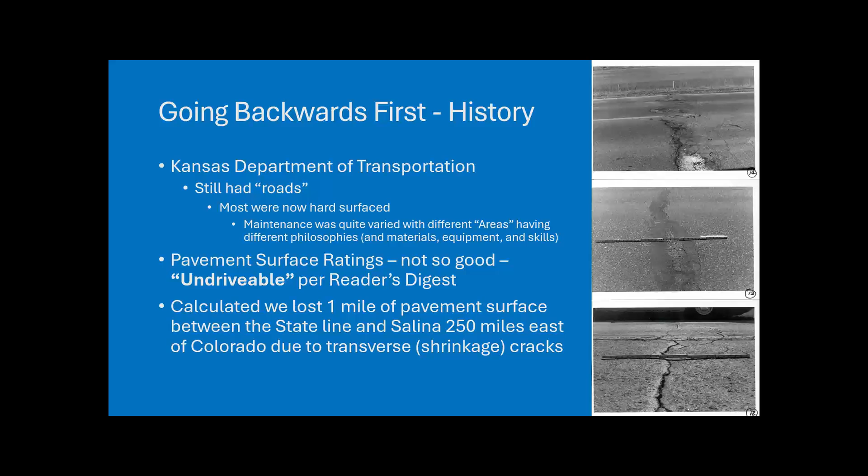The road conditions and political forces moved the governor and legislature to replace the State Highway Commission in 1975 with the Department of Transportation. This put a secretary from Oklahoma in charge. It broadened the scope from highways to transportation, and it recognized and started to act on the need to shift from construction to a maintenance focus.

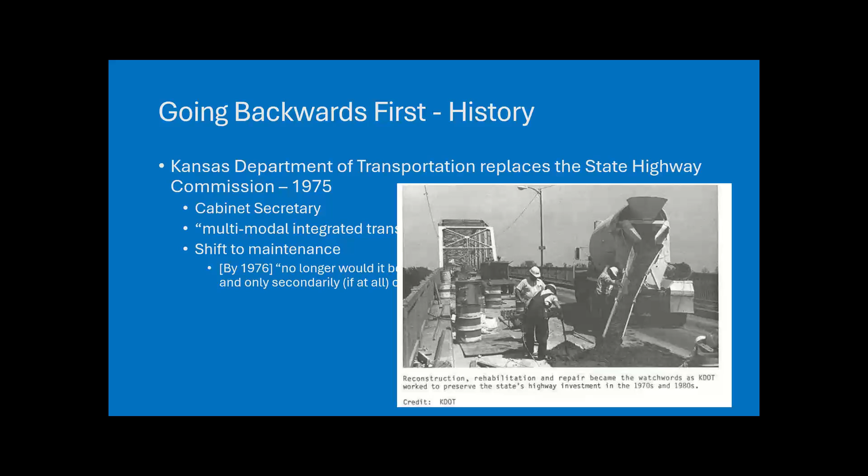KDOT was not doing all these things without outside pressure. The Kansas legislature was working on plans to tell KDOT how to build and take care of roads. Folks in KDOT wanted to make those decisions without being told by the fine folks at the State House exactly how. So we developed a priority formula to select capital projects and instituted a pavement management system to guide the selection of preservation projects. The state legislature also passed the transportation funding program in 1989.

That is not a trivial thing. Money was required to make all this work, so we need to remember to thank those folks too. What this program did, besides providing funds, was to move from KDOT working on the roads to KDOT hiring contractors to do the bulk of this preservation work.

So what did KDOT do to make these improvements? Basically, the idea was to do light work on pavements in good condition to keep them that way. It was set up to do about 1,200 miles per year, and the typical actions were chip seals and 1.5 inch overlays.

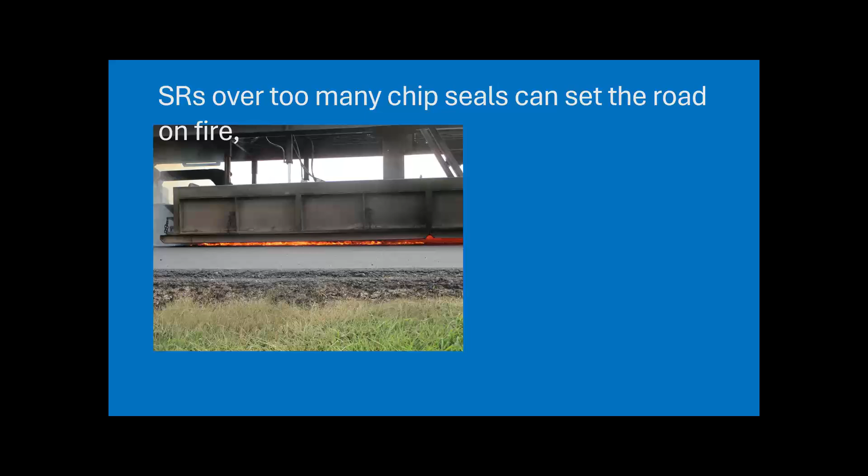For instance, this is a hot in place recycling project, and you see the flames on the road. What you may not notice is the pavement is actually on fire. This is not exactly the desired outcome of this process, and it leads to other problems like traffic trying to get past this train having to go through some fairly dense smoke. So we try to avoid situations where this happens, especially HIPR over multiple chip seals.

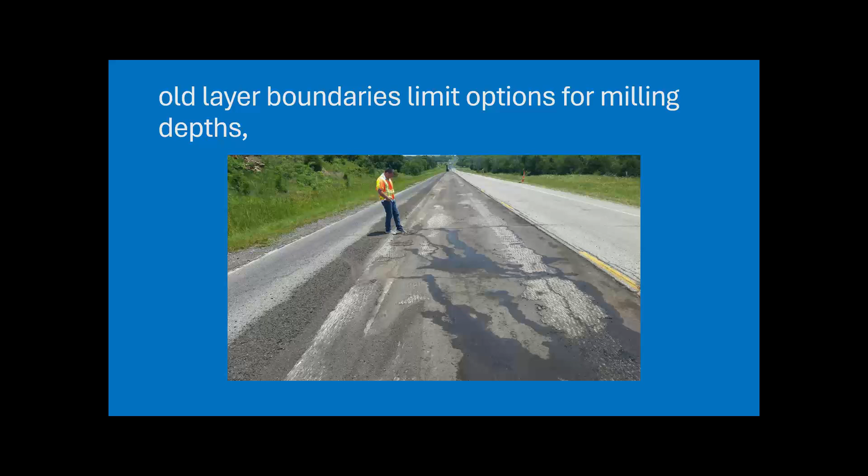Another problem we have is the depth we want to mill is not always good, in terms of sometimes those boundaries are not clean and we get scabbing like this. This guy is peeling up that remaining surface with his steel-toed Nikes.

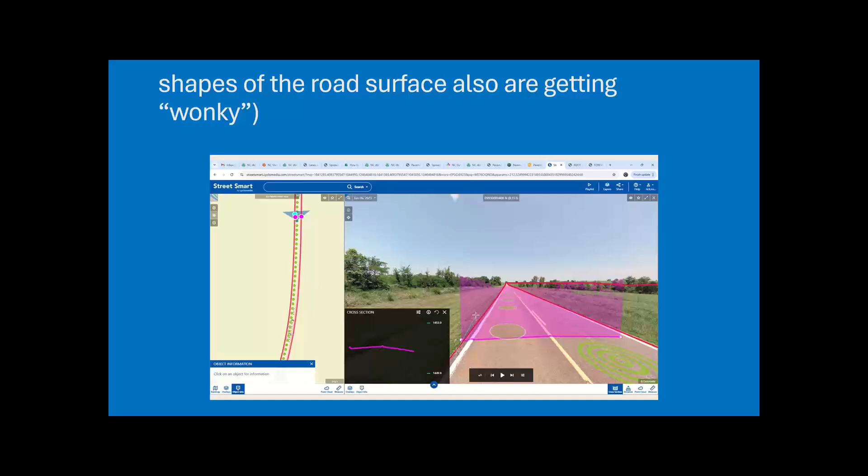So with that, the question becomes, what can we do? And I hope that my fellow panelists here can kind of pick up on that and take it from there.

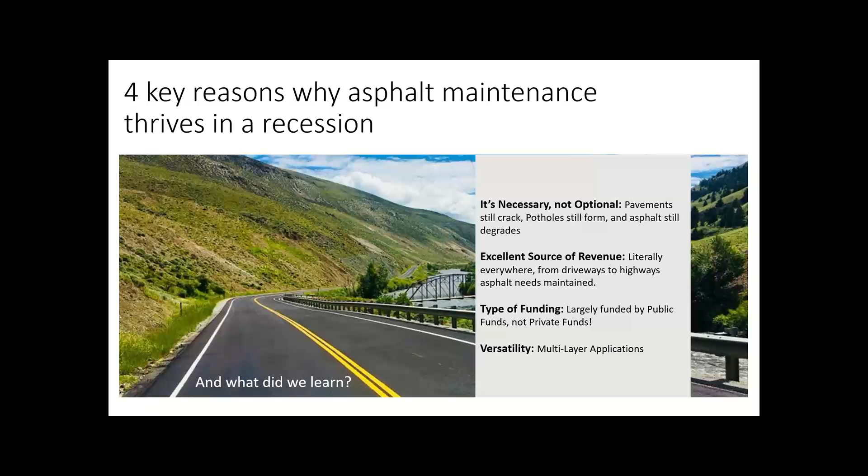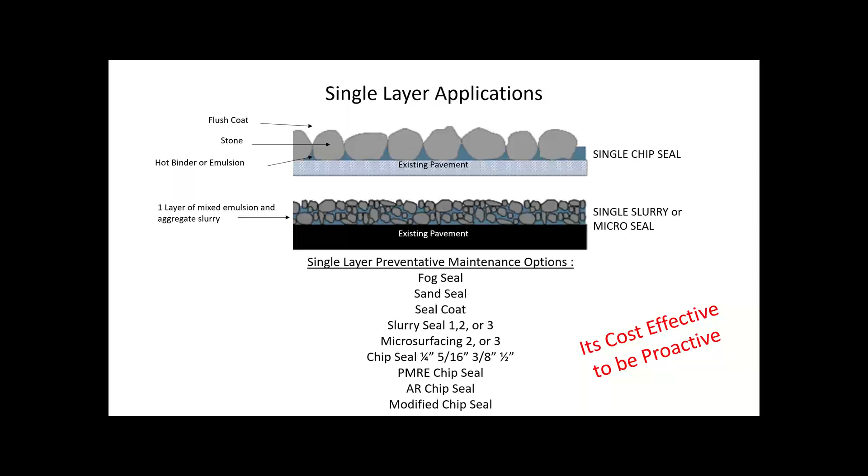It did make us realize that proactive maintenance has a whole new meaning once you hit a recession, because then there's less roads that you would have to retreat in those downturn times. The question is what can you do with streets like these? What if it's too late?

I think prior to 2008, most resurfacing contractors would shy away from streets like these. This is where we would give strong recommendations for some serious R&R, some reconstruct. In some cases, you would mill some of this surface off and put some new asphalt on top of it. But what if it's too late and you don't have the budget to treat streets like this?

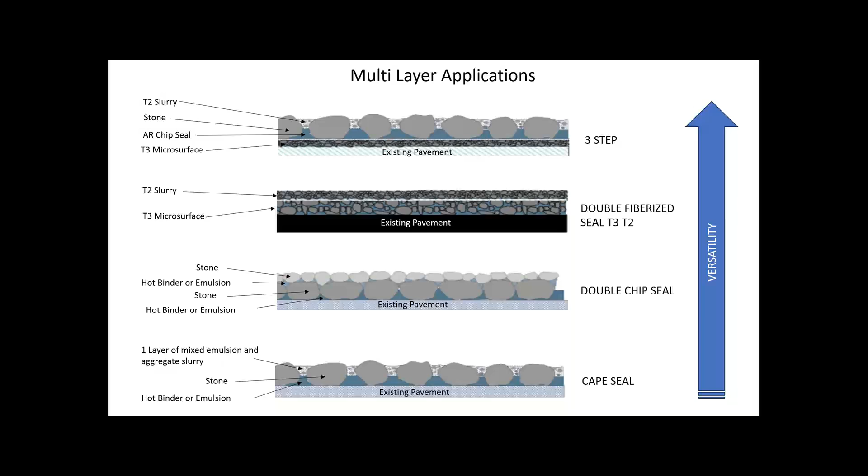While doing those patches, they saw that the base was actually in pretty good condition. It was a nice, sturdy, strong base. The asphalt was just really old and brittle and had never been maintained. They didn't do the preventative maintenance treatments that we discussed in our earlier slide. 2 weeks later, we were able to get that PCI rating up to a 79.

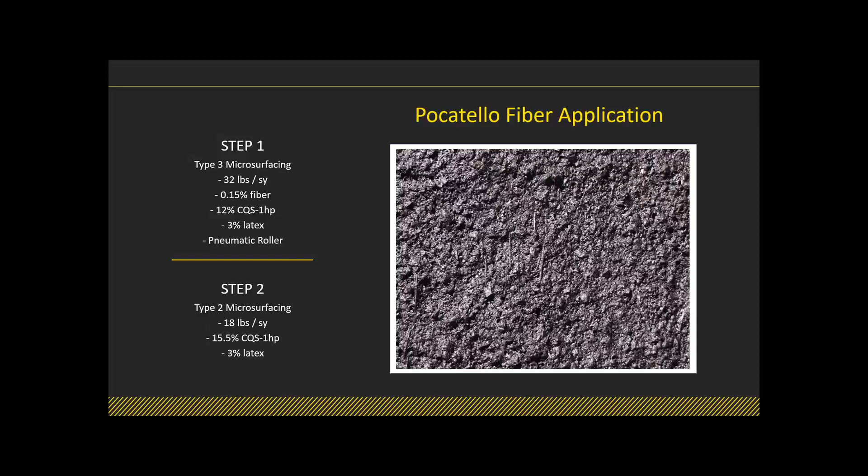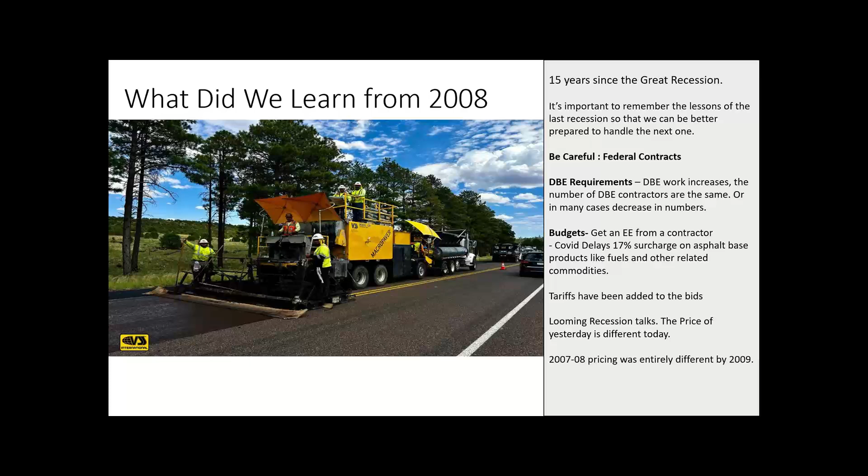So with looming recession talks in the future, the price of yesterday is different today. One of the things we learned, 2007, 2008 pricing was entirely different by 2009. So something to be aware of going into maybe a 2026 season as we put these projects on a shelf and they're ready to bid: your budgets might not be where they need to be to perform that type of work. So with that, I would just ask, consider those and many of the other questions that are coming in. Maybe it's something we can discuss today to be better prepared for a looming recession.

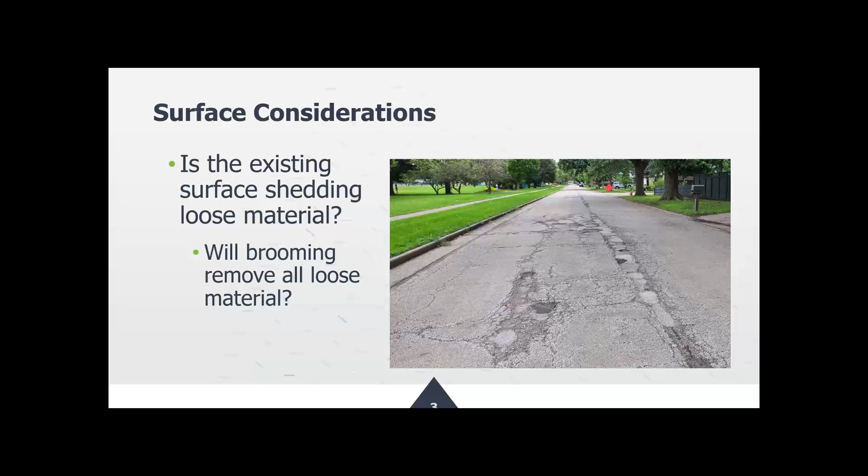So it's conceivable that there's enough wrong with the existing surface, and let's suppose that it's a pavement preservation treatment already, that it can't be cleaned up. It doesn't mean you can't do preservation, but instead of brooming, you might have to mill off what's there to come back with another preservation treatment.

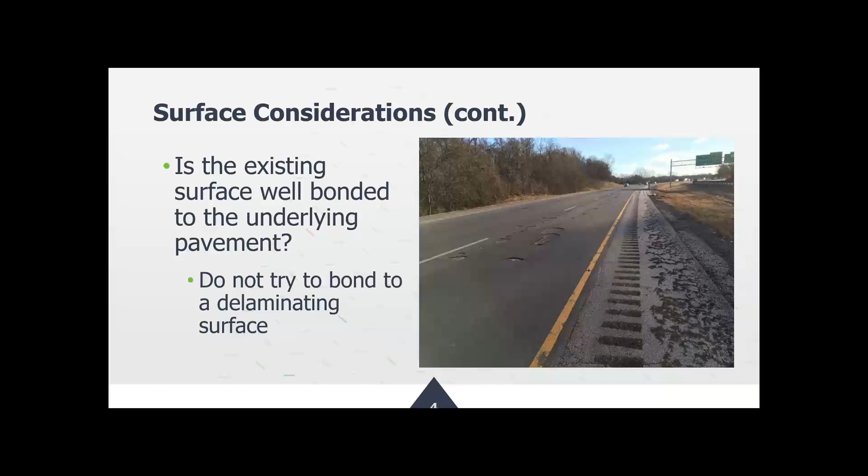But the bottom line here is, do not try and glue something on top of something that itself is not well glued, not well bonded to the underlying pavement. You will not get a well-performing preservation treatment.

The next consideration is just a suggestion that you should perhaps consider digging a little bit deeper. If the pavement's got some age on it, if it's got multiple treatments, and we're not in a recession or headed into uncertain times as Rick Cross described, and you really have some options to consider what's the right approach for a pavement, I think it really is helpful to do a little more investigation, spend a little more time, maybe spend a little more money, and try and learn more about what's going on in the pavement to answer those questions about whether it's still a good candidate for preservation.

So what types of distresses are present? How bad are they? How widespread are they? Should you or can you take a few cores to look at subsurface conditions and maybe get an idea of what's going on beneath the pavement in terms of bonding of layers and maybe subsurface water that might be impacting long-term performance?

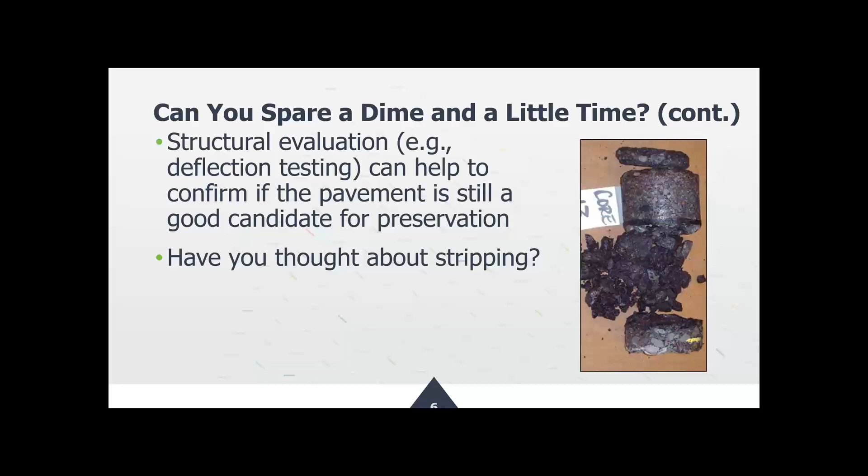So here's a core that illustrates that. Looking at the top of the photo down, you have a surface layer, another layer of competent asphalt, followed by a completely stripped layer of asphalt where the asphalt and the aggregate have completely separated. And obviously that's not a desired consequence of sealing up the pavement. Hopefully we don't have many stripping susceptible pavements out there anymore, but if you have pavements that have a history of stripping, you might want to investigate further before you cover it up with a preservation treatment or a subsequent preservation treatment.

So just to wrap up my portion of the presentation, a few summary suggestions. One is certainly look at existing conditions. Now, I understand that we can put preservation treatments on pavements in good condition and bad condition. We certainly have to temper our expectations if we're putting preservation on structurally unsound pavements, but understanding what you have both at the surface, what you can see, and potentially from additional investigation, what's beneath the surface, I think is a key to getting good cost-effective results from your pavement preservation treatments.

With that said, there's no reason why you can't place multiple preservation treatments on top of each other. If the pavement's in good structural condition, if you're not getting delamination, if you're not getting shedding material that will continue to loosen even as you try and glue it down from the top, by all means, an additional preservation treatment after some years should be effective.

Finally, to those who think, well, if the pavement's a good candidate for multiple preservation treatments, can't we just keep on doing this indefinitely? And I guess I can't say with certainty that you can't do this, but I think what we find is that at some point we reach the end of the structural life of the pavement, the materials have fatigued too much, there's nothing left to glue together, and maybe we can put a Band-Aid on the pavement and buy a year or two, but it really is not cost effective. It's just kicking the can down the road only a very short time.